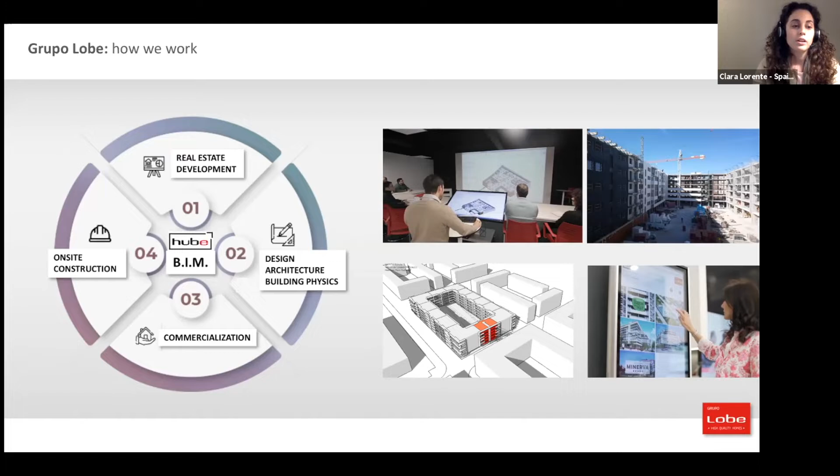And from the beginning to the end, the decision-making follows different criteria: design, commercial, energy efficiency, and so on, with a common goal of offering the best possible homes.

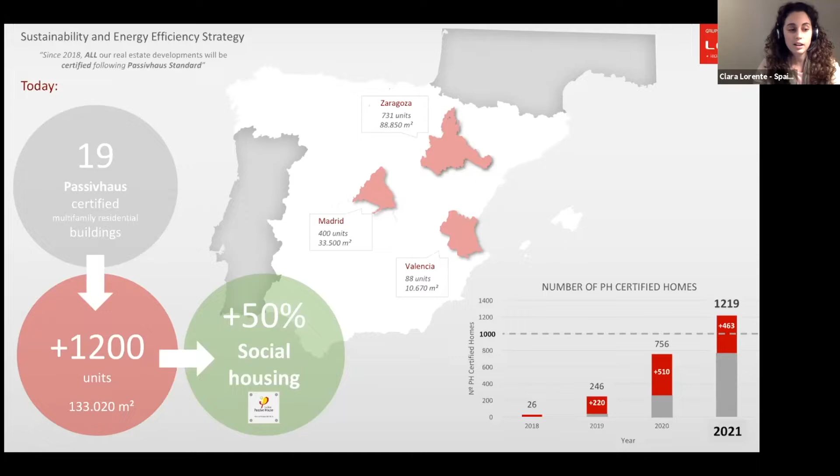Since 2018, Lobe builds only multifamily residential buildings that are Passive House certified. They are located in 3 regions: Zaragoza, Madrid, and Valencia. Right now we have 19 Passive House certified multifamily residential buildings, which make 1,200 units. We recently certified another this Monday, so it's now more than 1,000. And 50% of that is social housing, which means they are becoming more and more available in the Spanish market and at an affordable price.

Here you can see several projects that are already certified, under construction, or being designed right now. And since they are multifamily residential buildings, each one has a lot of surface area. This means our 19 certified buildings make around 70% of all PH certified area in Spain.

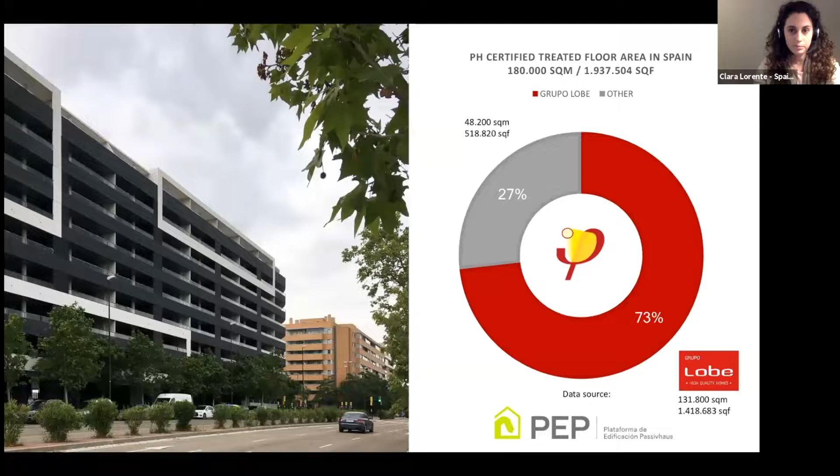Now I will talk about how we are going to achieve passive house quality. One of the first challenges we faced was the thermal enclosure progress. At the beginning, we had to increase the thickness of the insulation layer, so that meant the walls became wider.

In Spain, urban regulations limit the amount of build surface you can build in each plot of land. So that means that if your walls are really thick, you're compromising the actual size of each home. We call this the surface efficiency ratio, meaning the design is better the more usable area you have and the less gross floor area you occupy.

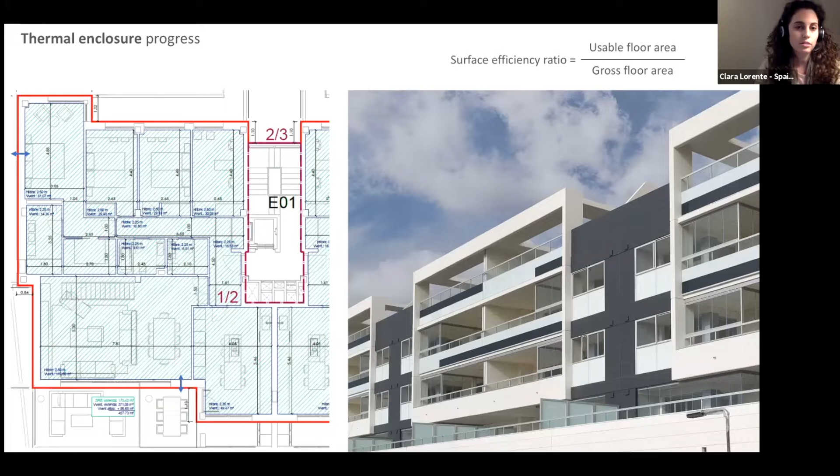And since then, we have been developing different wall sections in order to achieve the same hygrothermal performance in a more spatially efficient way.

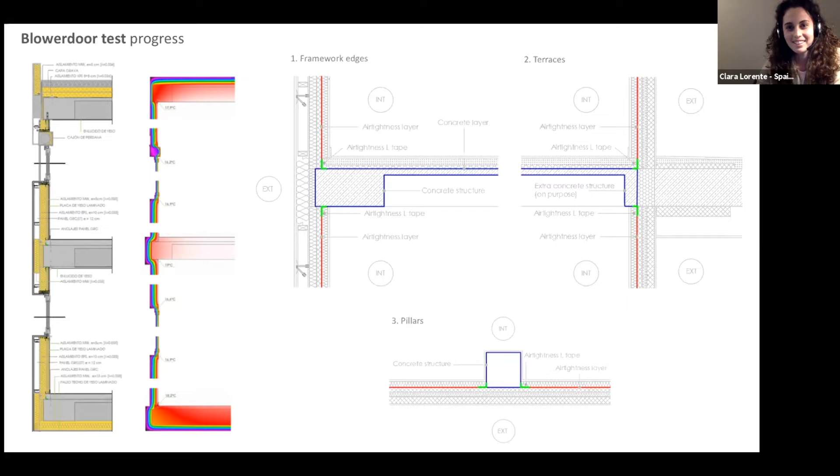Now, Ángel. Hi everybody, I'm talking to you about our progress in air tightness. On the left, we have a typical detail section of one of our buildings with thermographic diagrams for each thermal bridge. On the right, you see 3 details about the air tightness solution.

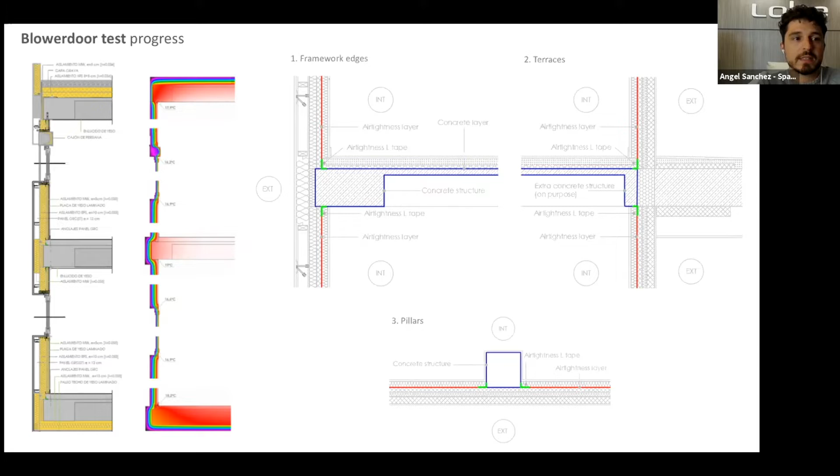In fact, all of them follow the same principles. We solve vertical air tightness in red with prefabricated insulation panels, while horizontal air tightness is solved taking advantage of the concrete structure in blue. This way we create an individual enclosure for every apartment, which is very useful for us because we have individual mechanical ventilation with heat recovery.

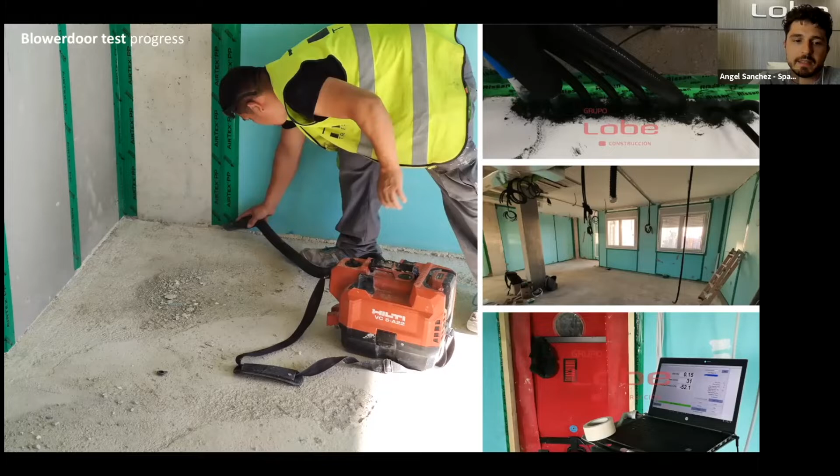After many projects, we decided to improve our solution, making it easier, cleaner, and faster, and I honestly think it was a great idea. Now we seal everything with airtightness tapes, except installation and other system pierces, while we seal windows only with pre-compressed tape with vapor barrier layers. And it was worth it. In my opinion, it's working quite well. On the right bottom picture, we have a typical apartment with 0.15 renovations per hour.

All this progress means getting better in terms of quality, but also getting faster testing. By this, we can fit into the production schedule, not delaying critical tasks.

We have our own blower door equipment, 5 in total, and we test every apartment individually, at least 2 times. The first test ensures the airtightness is okay. This way we can figure out possible mistakes or missing points, and we can ensure that passive house standards will be met. Then we do another final test with an external observer as an auditor, in order to guarantee our clients the fairness of results.

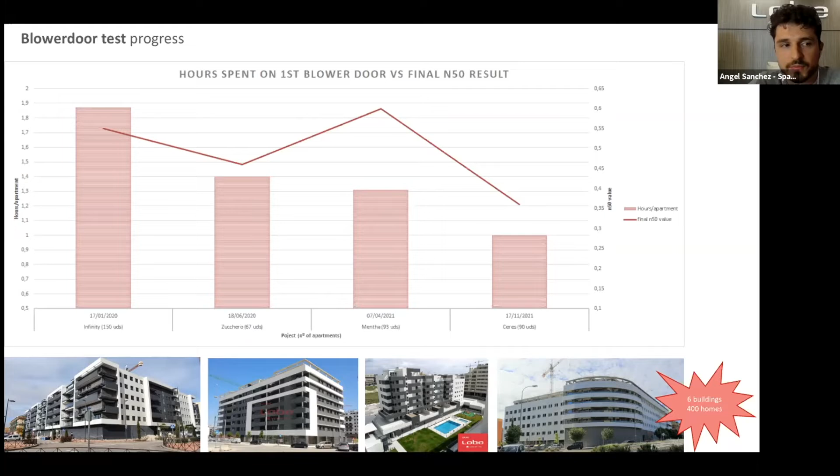Just to give you a brief comment about how we try to improve building processes, I think you would like to know Lobe's workflow. We designed the building and its production process in a lean project delivery system. We work together, divided in groups, into the same BIM model. Lobe has created its own software based on a construction 4.0 philosophy, called Hube.

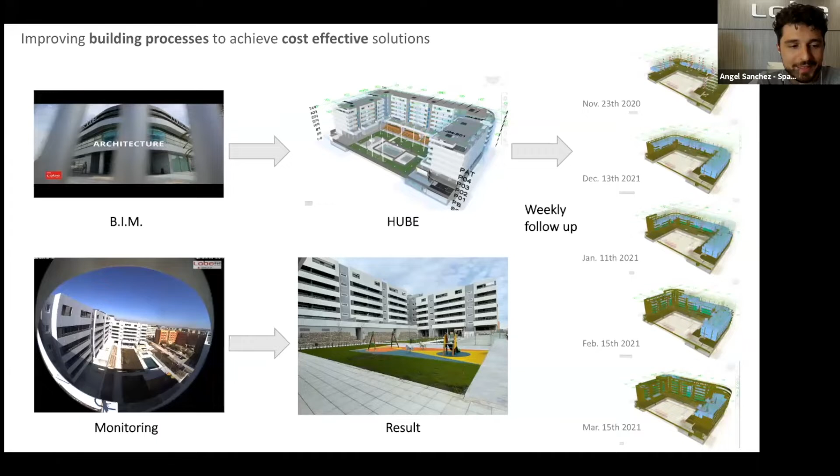Here in this slide, we can see the result of all this process. We built a symmetric building a few years ago. The first phase met the national building code, and the other phase was passive house. Each phase has 63 units. In terms of materials and components, going for passive house meant an increase of 3,000 euro per unit.

But improving construction services and using industrialized solutions meant we managed to reduce around 1,000 euro per unit in terms of construction services. That way, the total construction cost increase in the second phase, the passive house ones, was only 2% more.

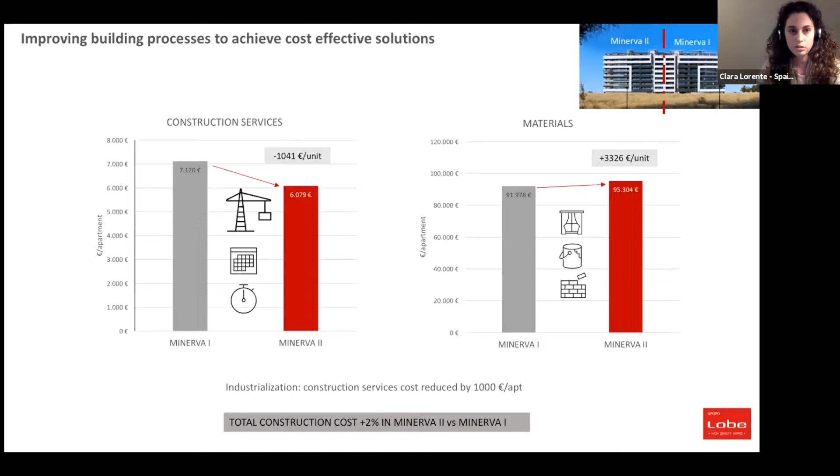And now I will talk about another challenge: summer performance. In Zaragoza, Madrid and Valencia, we have climates similar to California. So cooling is our main energy demand.

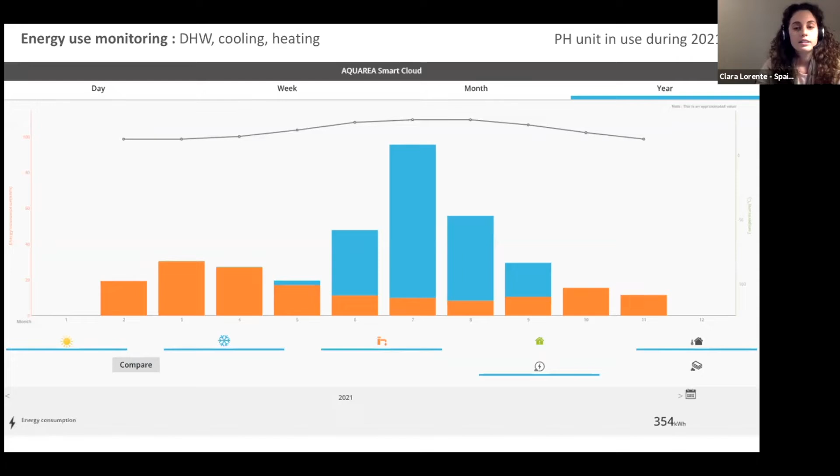Here we have an example of energy consumption of an apartment during 2021 that we are currently monitoring. As you can see, they have only consumed domestic hot water, pictured in orange, and cooling, pictured in blue. The apartment is in Zaragoza, has good orientation, and is run by neighbors. Here you can see where it's located, for you to picture the location better.

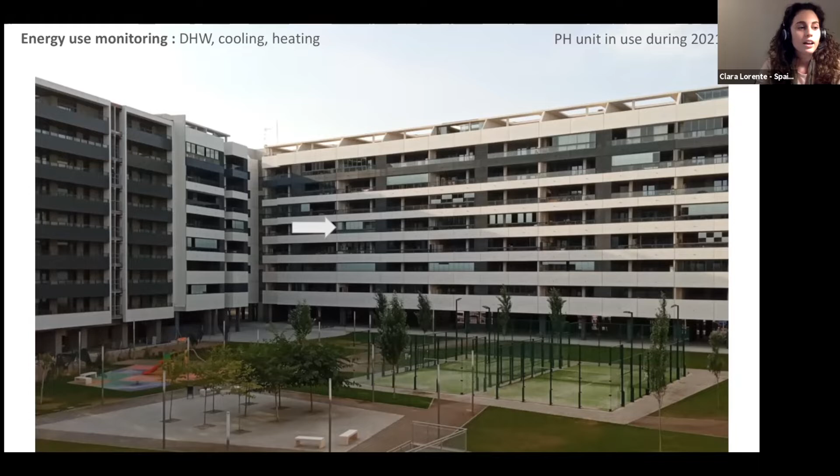This example doesn't mean we never have heating demand, but I think it shows more or less how it works. So shading is really important. We need to think about overhangs, terraces, and roll-up blinds to essentially avoid overheating.

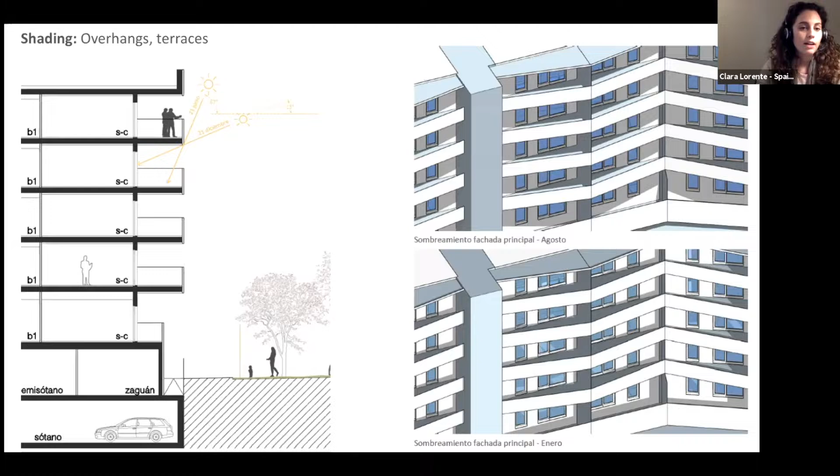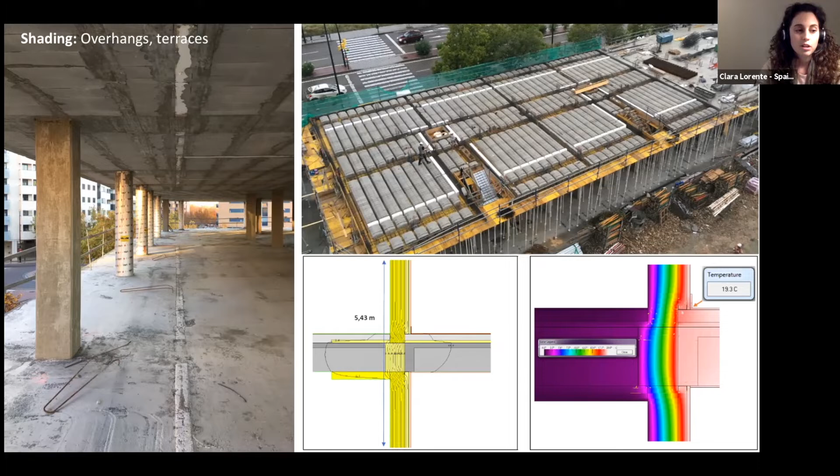We have developed some details in order to limit the thermal bridges that appear when building terraces. Here you can see how we include high resistant elements embedded in the floor slabs. The blocks are located around the perimeter of the thermal enclosure in each home. Our goal is that terraces keep the facade walls shaded during the hottest times of the year.

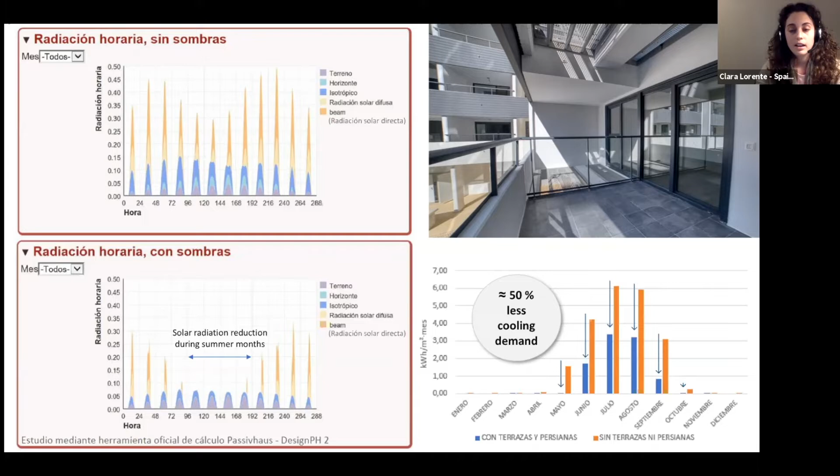Shading also greatly reduces the amount of solar radiation absorbed by the walls, and therefore can result in around 50% less cooling demand.

Exterior shading of the windows is also important to limit solar gains in the hot months, but the fact that it could be removed is useful in winter to reduce heating demand. So in Spain, roll-up blinds are common. They provide not only light control, but also safety and privacy.

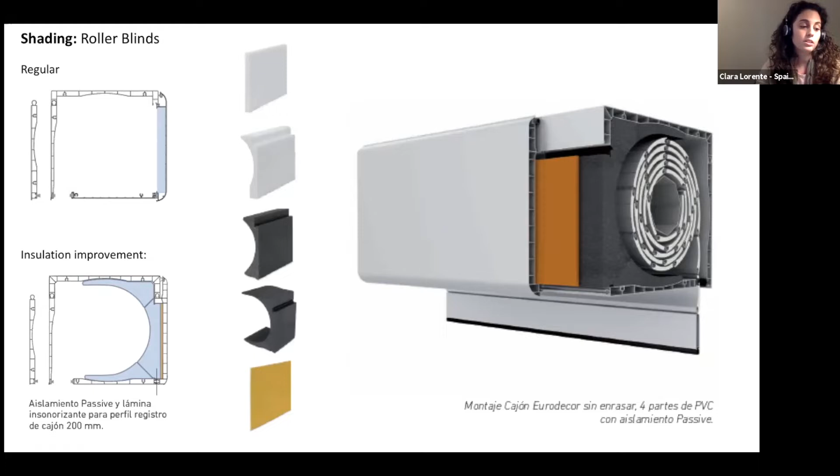However, traditional roll-up blinds have two handicaps: they are a huge thermal bridge and they are not airtight. So we've been working with various local manufacturers in order to improve the products available in the Spanish market, and we have redesigned insulation and joints to make them airtight and reduce thermal bridges.

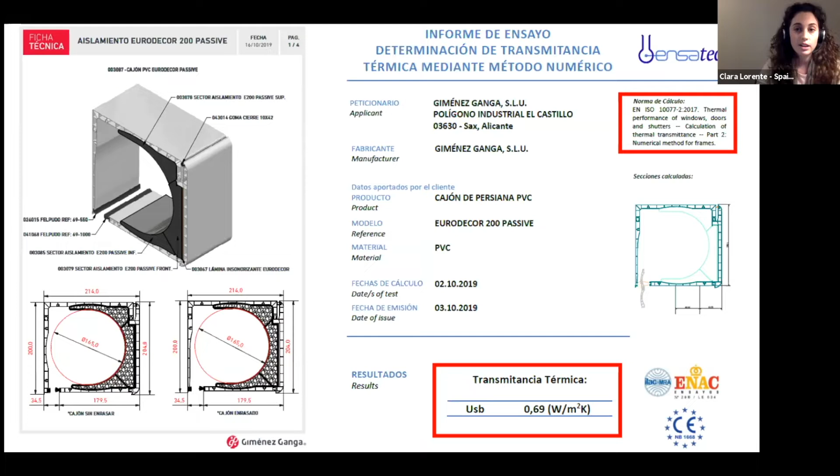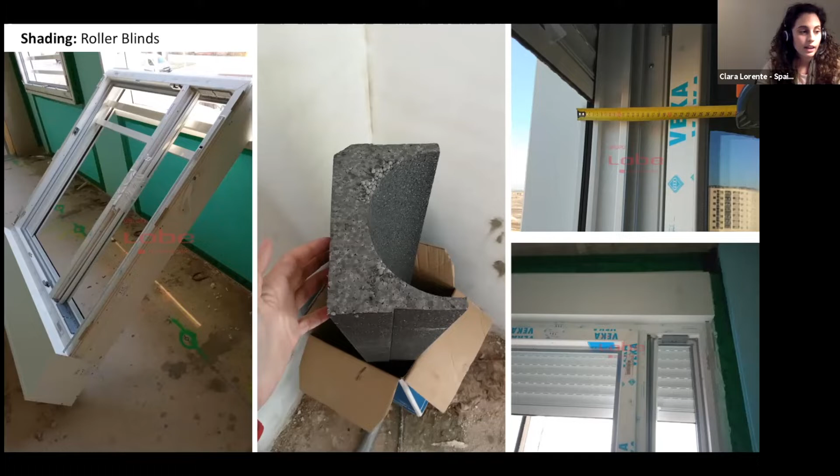Here you can see a data sheet and a lab essay of one of the models we have co-designed with one manufacturer. This kind of roll-up blind comes as a block with the rest of the window, so it's easy to install, and it comes with a half-moon of insulation inside the PVC box.

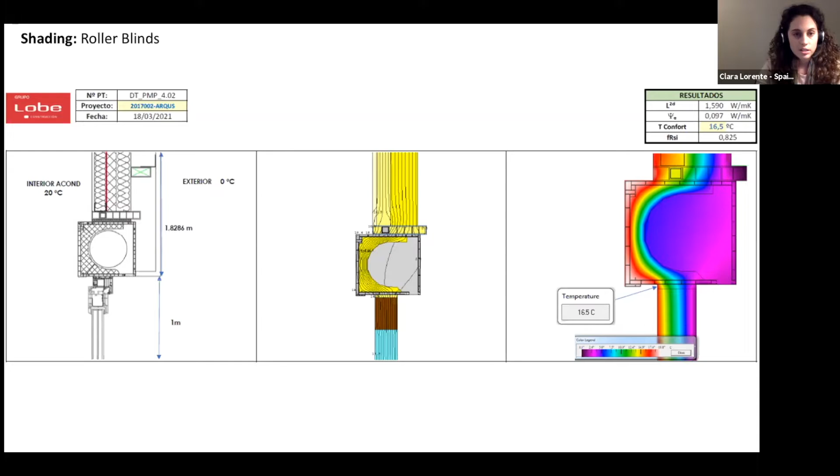Finally, we can see an example of thermal bridge caused by the roll-up blind. As you can see, there's still some heat loss through them, but shading is much more important in our climate.

To end, I'm sure you can imagine that more than 1,000 units mean more than 1,000 different families are already living in our buildings. This has been a challenge in terms of finding a way to easily explain how everything works, provide a support service whenever they need it, and make sure everyone thinks living in a passive house home is something new, but not necessarily something difficult.

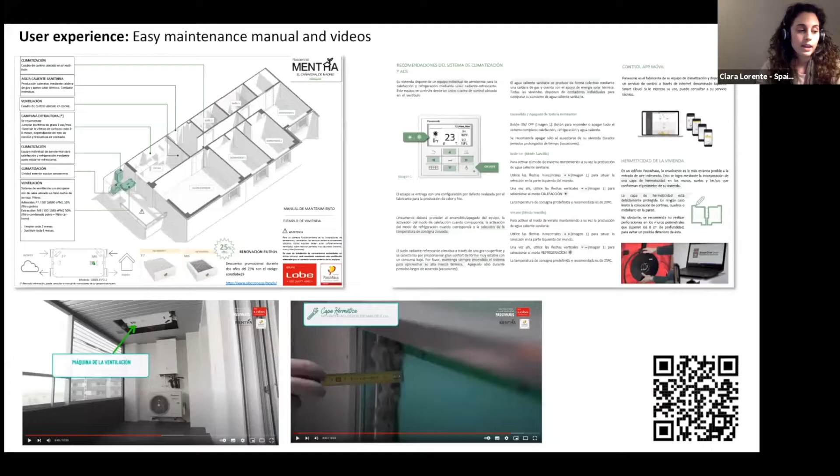Here you can see some info and documents that we have developed. We find really useful an easy maintenance manual and videos that we produce for each building where everything is explained.

Last but not least, one of the challenges we are facing now is how to reduce our carbon footprint. We are following European regulation to quantify it, and we are carrying out a real building evaluation to compare results to different improvement scenarios. In the first case, in blue, we adjust the building to compulsory energy efficiency regulations, just changing the thermal enclosure. In the other case, in orange, we propose a cross-laminated timber structure instead of the reinforced concrete we have.

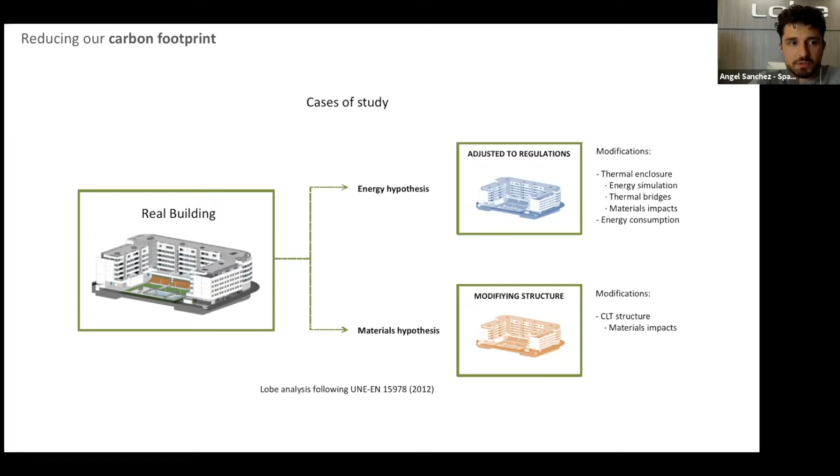We generate a list of elements through the as-built BIM project and our energy simulations, and associate their impacts from reliable databases. Since we know our carbon footprint or global warming potential per system, we can compare different alternatives. Comparing with regular buildings lets us know how much industrialization and passive house contribute, while we can study new opportunities and scope for improvement with new solutions.

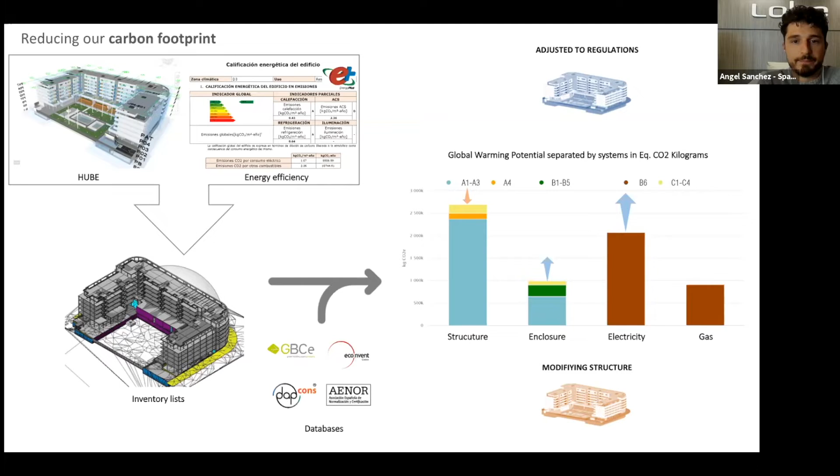I think that's all. Thank you for your attention. Thanks to this wonderful platform for having us here today, and I hope you find it interesting.

Sorry, I'm a little bit behind here. No worries, bring it up. All right. Yeah, thank you very much. This is a really great presentation. I can't wait for the discussion here.

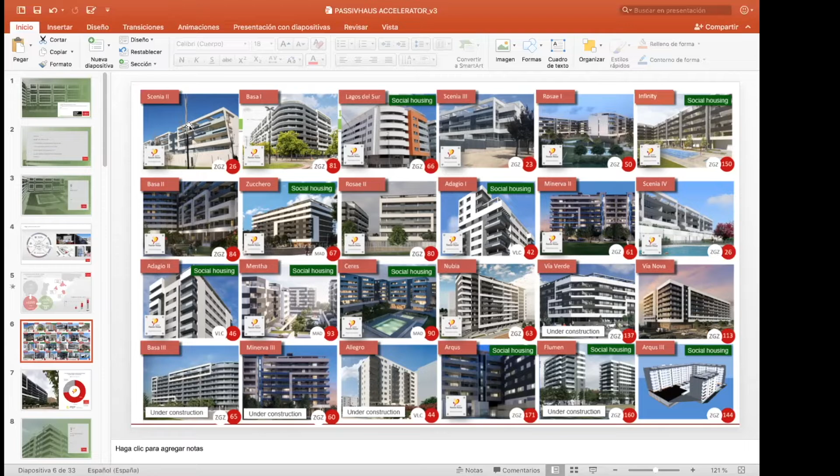There we go. Houston, did you have a specific question on this, or did you just want to see it again, the amazing details and designs? Well, I think I'm just like you — I wanted to see it, it's incredible how many they've done.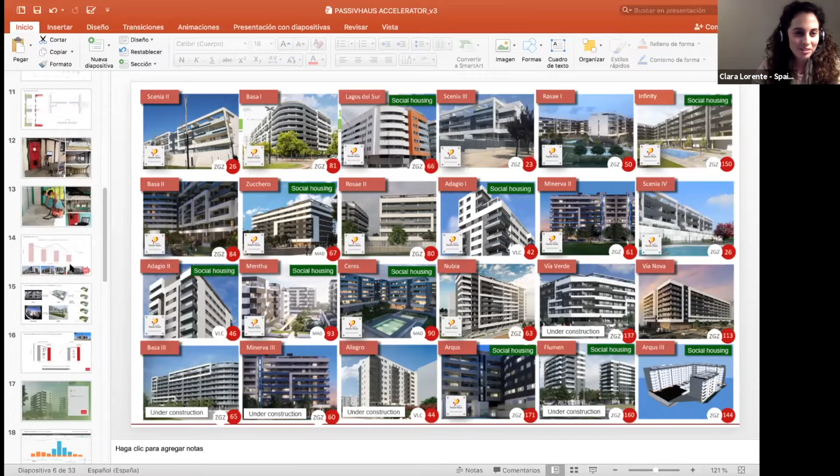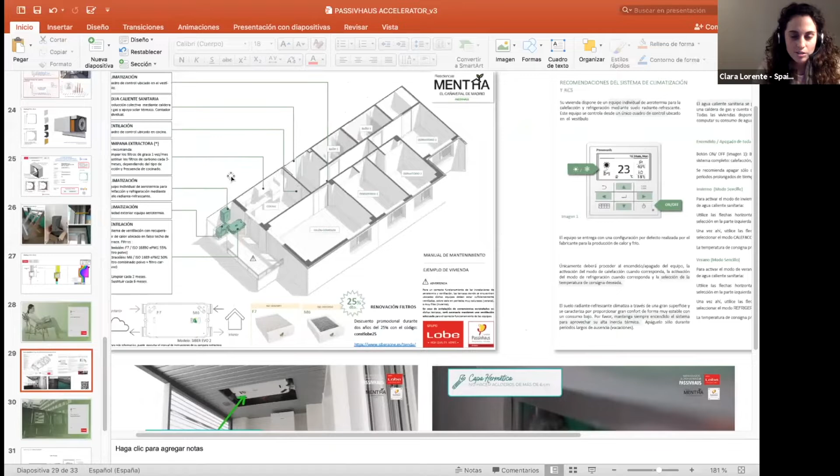But I have a separate question: how is this thing heated and cooled and ventilated? Great question. We haven't got a slide about that — let me check if you can see it in some of these slides. Maybe in there, yeah, okay. So here we have a heat pump, air to water, so heating and cooling is produced both by this heat pump, and the water goes through a radiant floor.

So the radiant floor works for heating and cooling in Madrid and Zaragoza, because the summers are really dry and we don't have any problems with humidity or surface condensation on the cooling floor. In Valencia, we use a heat pump, but air to air, and we mainly do cooling by air.

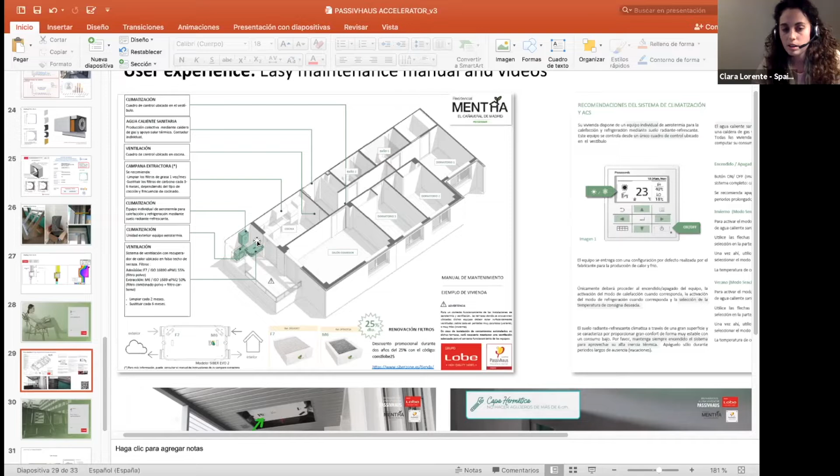And the ventilation unit is here. As you can see, it's individual. We have one in each apartment, like a star system. You can't see it here, but we have different valves in it. Here you can see it, and this is one of the terraces, and this is the heat recovery ventilation and the heat pump. I don't know if it's okay.

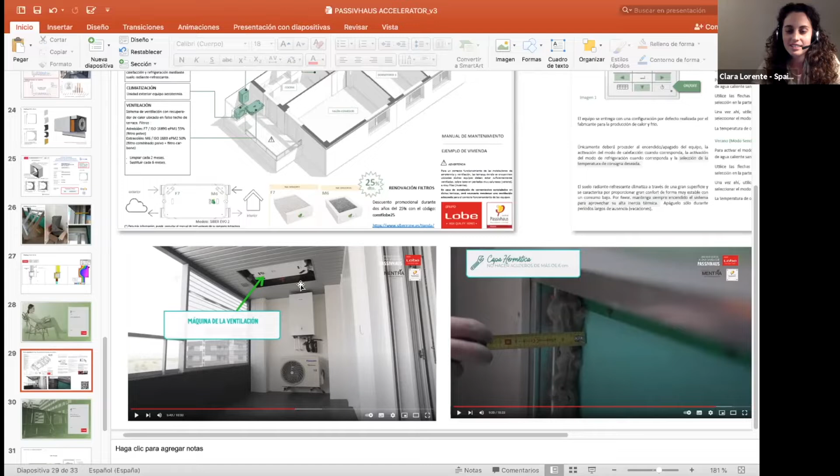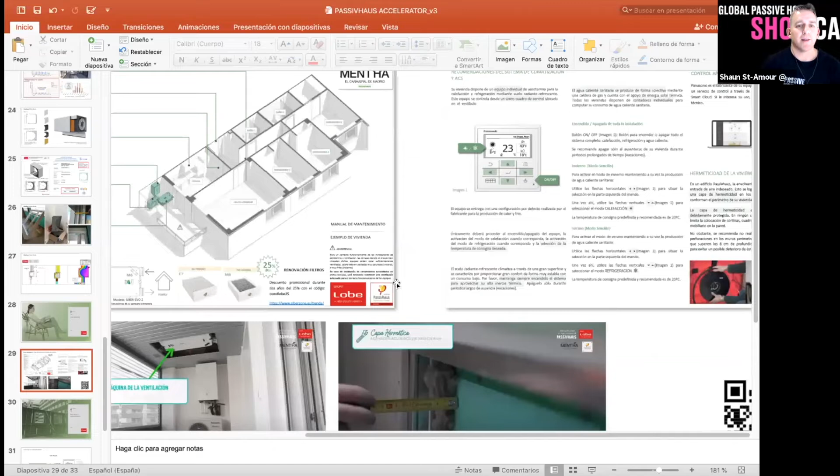No, that's great, I can see it. Houston, are you happy with that answer? Again, it's top notch in terms of what you're trying to do for the clients and making sure they've bought into the system and can understand it. Great infographic for your clients.

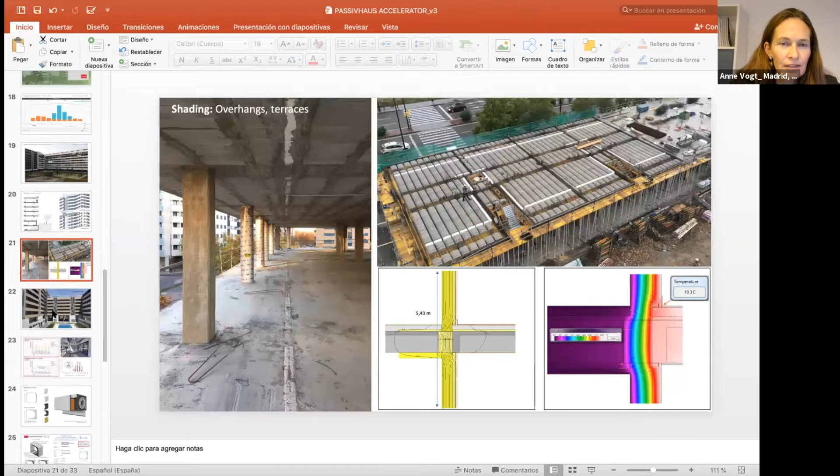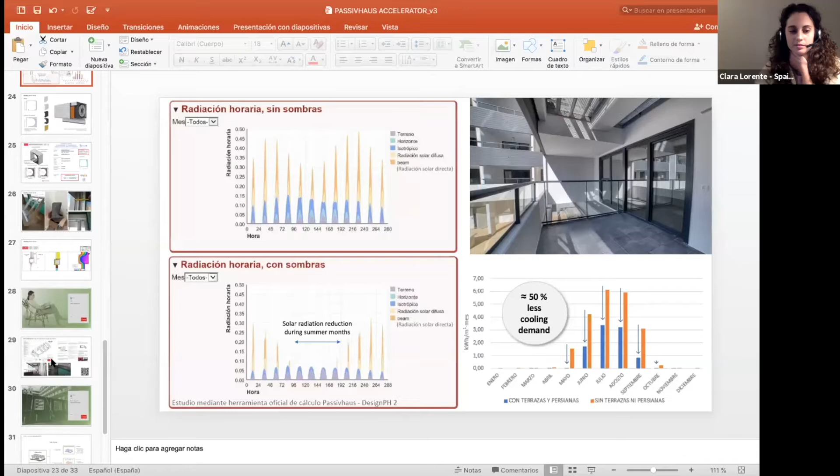I think it's more like a cupboard, I think you're referring to where they have the installation. Okay, maybe I didn't see correctly, but I thought that was at the railing of the balcony, at the top edge — sometimes there are external shades. No, I think it's at the end of the terraces. There is like a cupboard which can be closed, so you don't see the heat pump and external unit. I think he's referring to this — do you mean this part? It's just a closet.

Yeah, this is really common in Spain, and it's put in all the buildings so people can hang clothes to air dry them. Right, because yeah, this is for that. I see, okay, thank you.

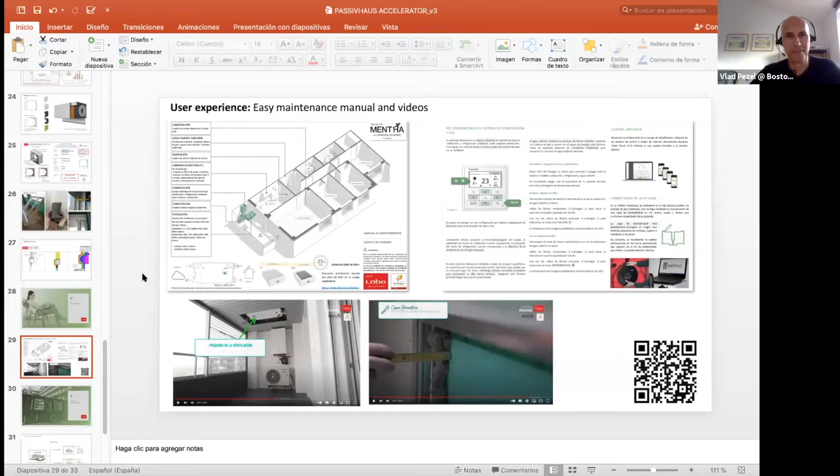Yeah, great space, it's just great how you guys — I mean, we talk about the Passive House principles, always talk about high performance glazing, and then exterior shading in brackets, because we haven't quite incorporated that in North America, and you've done a great job describing that today. I appreciate you working with the exterior shading company to add that extra layer of insulation. You guys are really diving into the details, and your PHPP models are probably down to the micromillimeters. You've found really good details with those thermal breaks and finding solutions, so it's just fantastic.

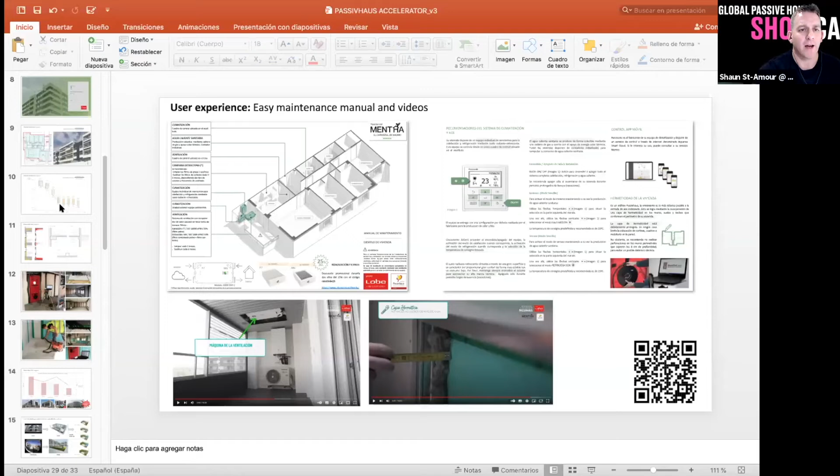Patricia wanted to see the wall structure slide again. Clara, could you put that up? I think she's looking at the evolution of your wall design. I know Patricia doesn't have audio, but are you finally happy with the last wall? Is that the one you'll roll out for the next few, or are there still tweaks to that particular one?

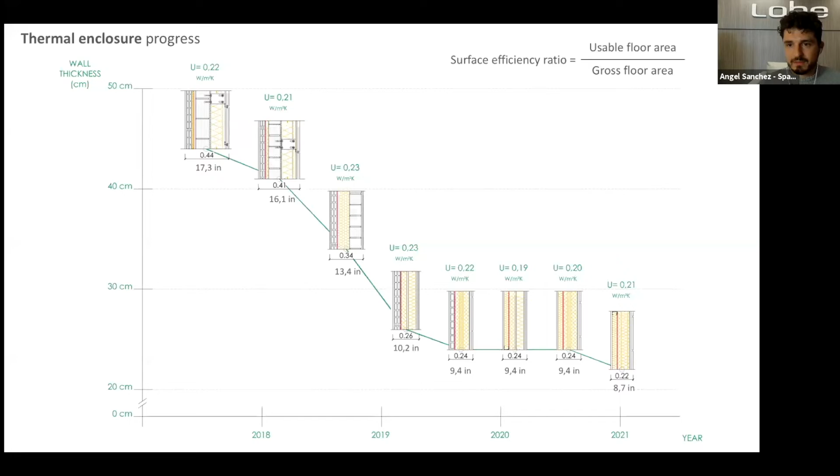I think this never ends. But yeah, this is the last one. Can you clarify the buildup? Yeah, so we have the main part, with gypsum board and rock wool. And this is the panel Ángel was talking about. It comes as a whole, made of a lot of different layers. Then we have a porcelain finishing, like tiles, but they don't have concrete between them, so the wall can breathe and dry in both directions.

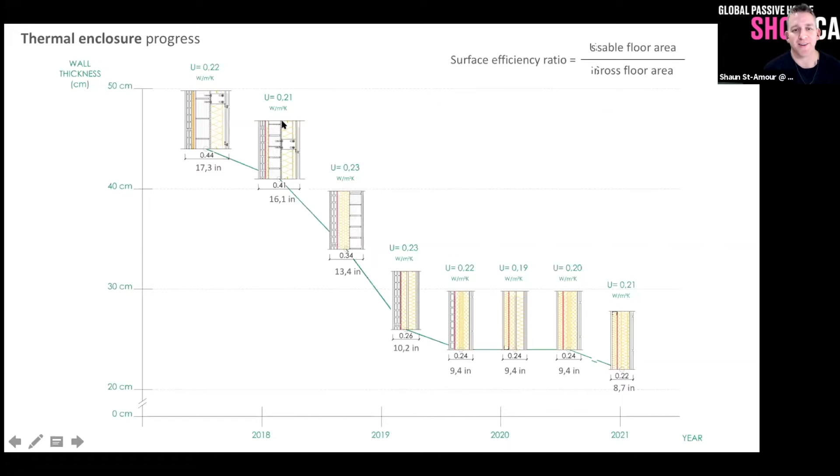Very cool, it's great to see again how you've shown the wall's evolution through 8 different systems. The beginning was all masonry, both interior and exterior, then a ventilated facade with a layer of insulation between them, then some changes to gypsum board solutions on the main part, and now we have a few versions of the panels. This has been our journey, and I think it will keep evolving.

Thanks a lot, Ángel and Clara, for the presentation and for answering all these questions. Just a short story about the Rollup Lines: it's very common now in Spain to have 30 or 40 windows which are Passive House certified, and already 2 Rollup Lines certified as Passive components for the warm temperate climate we have here. But you not only need the component, you need to know how to use it too. Sometimes projects use the same Rollup Lines or windows Grupo Lobe uses, but they don't connect the insulation of the Rollup Line with the window properly. If you disconnect them and install them like a compact Rollup Line component with the window, you get a big problem of humidity in the middle. So sometimes architects with experience in passive houses, and carpenters who already worked for Grupo Lobe, think they're doing the same thing, but they don't understand what they're doing. I also wanted to say Grupo Lobe isn't only pushing the producers of components, but also pushing construction companies, because Grupo Lobe offers lots of passive houses in 3 different cities of Spain. So other companies offering similar services have to offer something similar, but sometimes they only design to Passive House standard without certifying - so they don't really do passive houses. It's very interesting that in these local markets of Zaragoza, Valencia and Madrid, construction companies that don't really want to do passive houses are forced to, because Grupo Lobe is pushing a lot on the local market.

Yeah, for daylight. I'm going to share my screen one more time - forgive me, but they are so uncommon here that there's a lot to learn about them.

Did you say that the roller blinds are integrated with the window? Yeah, you can see it here - the window comes already with a roller blind installed. That is advanced. We choose the position so the thermal bridge is controlled, but it comes with a normal block, like a normal window.

So you don't want to create a thermal bridge at the box of the roll-up line. That's why that box is insulated. But this is still a thermal bridge - it's not perfect, but the advantages outweigh the disadvantages. I understand it better now - that's why the box needs to be airtight, because it's part of the air barrier process, and it's part of the window.

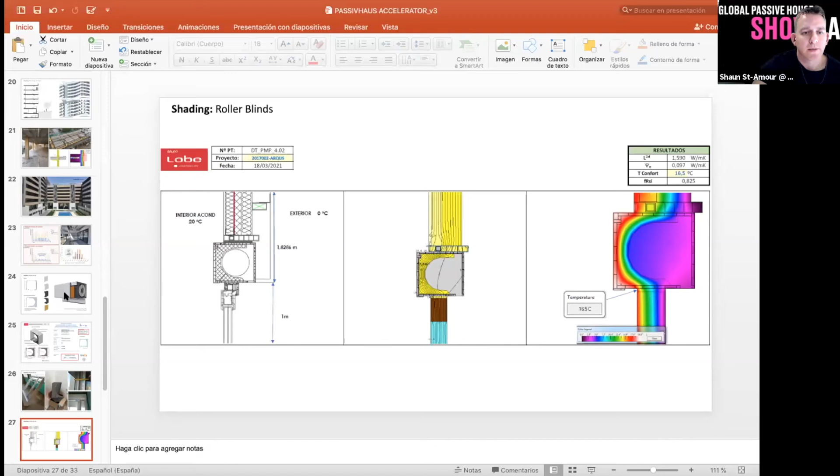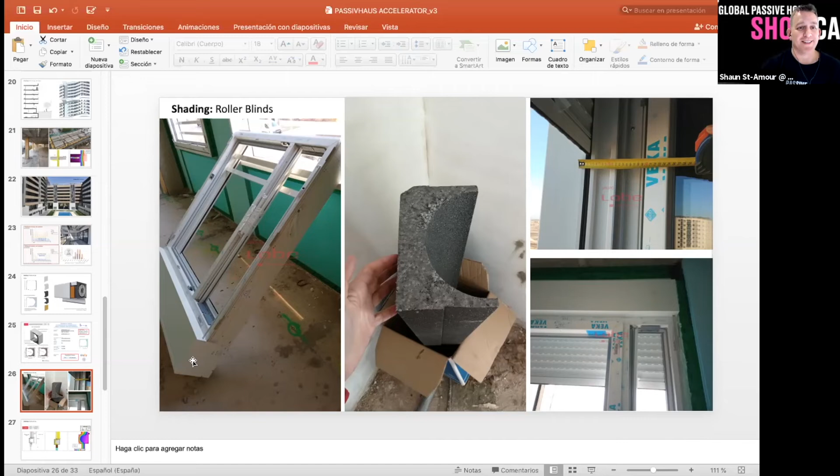That's really advanced. A lot of times we've seen it where the blinds are installed in front of the window, so you'd have the top frame that's insulated to help with that thermal bridge detail. But it's a very cool detail we all need to chew on - how do we get that in North America? So everyone, talk to your local blind supplier and see if they're interested in going exterior, because there's definitely a market in what we're doing.

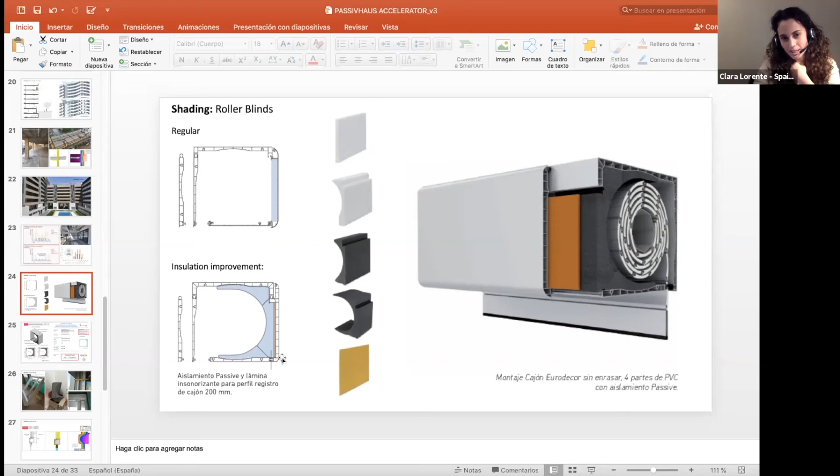Think about hurricane resistance - we have a really windy climate here, and this is really taken into account. Very cool.

Jean, did we get all your questions? I know you had a couple there. Thank you, that covered everything.

I had a question about the mechanical system, where it was located as part of the apartment. I think it's great that you have that area with an outside blind so you can hang your laundry and not have it visible, and then get the heat coming off your heat pump condenser to help dry it - that's wonderful. It's like, how functional can we be in this whole thing? We'll just go down to the details - people want to dry with less energy from the dryer, so we'll create this dryer on the outside. Brilliant.

So many brilliant points you guys have discussed tonight. What works here is if you have a basement and a heat pump water heater and laundry lines next to it, the airflow around them will help the clothes dry quicker. In Spain this is mandatory - all building by urban regulation has to think about this.

Just brilliant. So Houston had another question before he left - does your company have in-house MEP engineers, and are they also Passive House certified? MEP is mechanical, electrical, plumbing. In Madrid we have really good professionals in MEP, but they're not necessarily certified as passive house designers. They just have a white book - a book with the things they have to take into account - and we just take control into the project and make some advice, and that works very well.